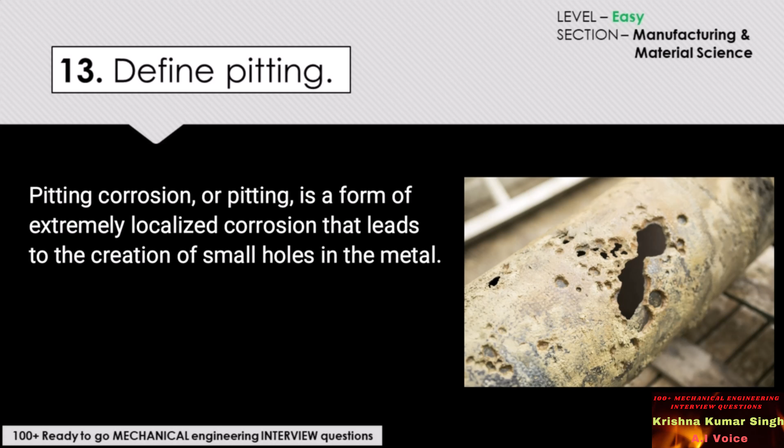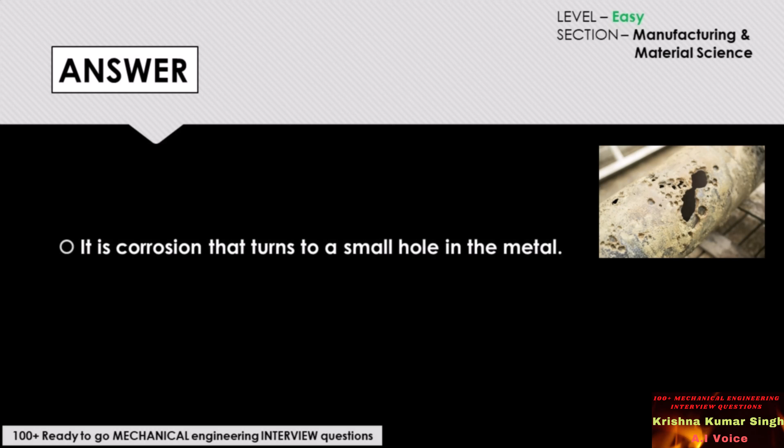Define pitting. Pitting is a form of extremely localized corrosion that leads to the creation of small holes in the metal. The perfect answer for this question would be, it is a type of corrosion that turns to a small hole in the metal.

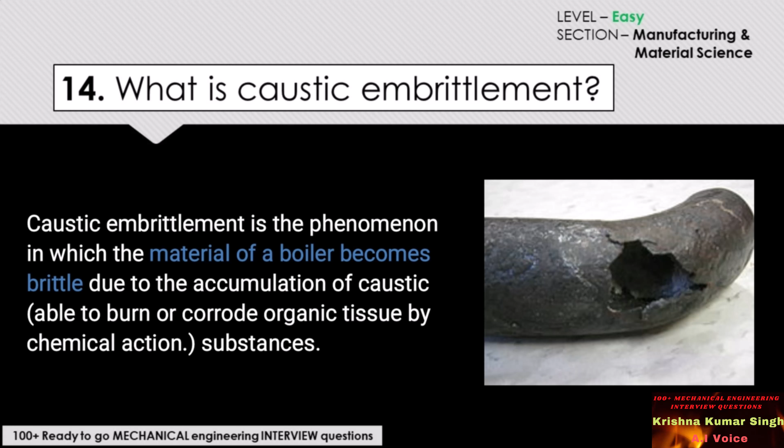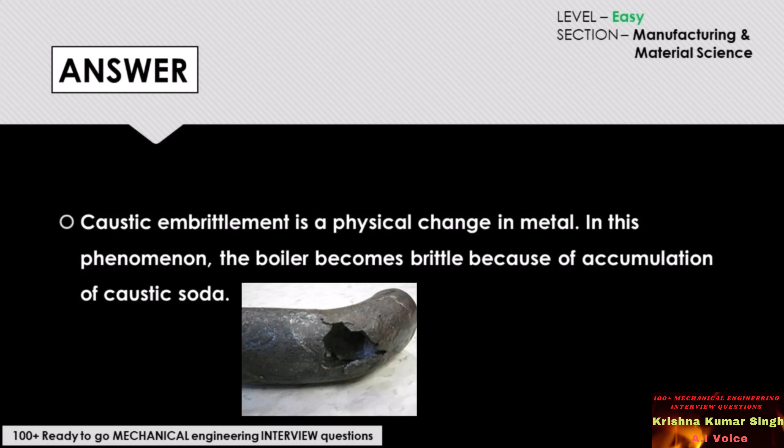What is caustic embrittlement? Caustic embrittlement is the phenomena in which the material of a boiler becomes brittle due to the accumulation of caustic substance. Now, this caustic substance are the substances which are able to burn or corrode organic tissue by chemical action. So the perfect answer for this particular question would be, caustic embrittlement is a physical change in the metal. In this phenomenon, the boiler becomes brittle because of accumulation of caustic soda.

What parameters influence the tool life? Tool life is defined as the time period between two successive grinding of tool and two successive replacement of tool. A cutting tool should have long tool life. When a tool no longer performs the desired function, then it is said that the tool reached its end of life.

A tool's life is given by Taylor's tool life equation, which is given by Vt to power n is equal to C. So the perfect answer for this question would be, the parameters influencing tool life are tool material, work material, speed, feed, depth of cut, tool geometry, cutting fluid, built-up edge generation, and vibrational behavior of the machine tool.

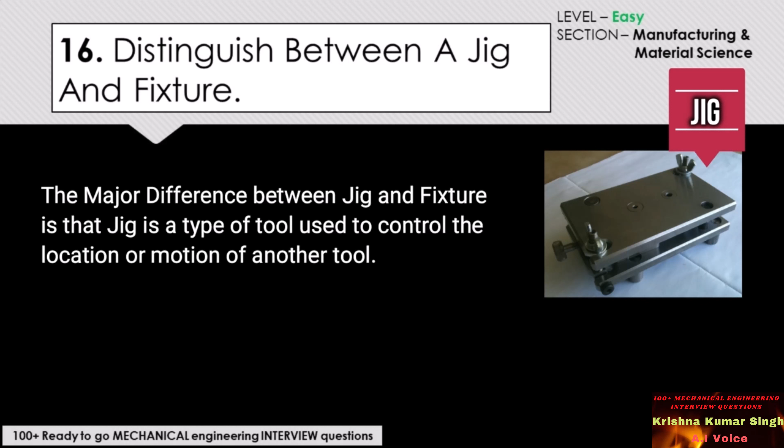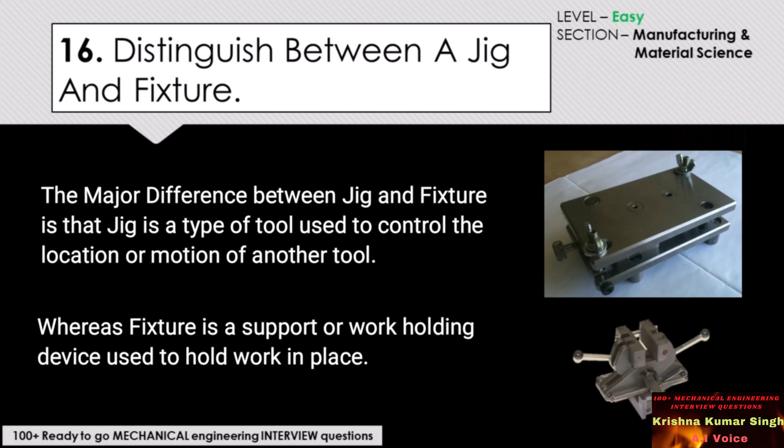Distinguish between a jig and a fixture. The major difference between jig and fixture is that jig is a type of tool used to control the location or motion of another tool, whereas fixture is a support or a work holding device which is used to hold work in place. In metal and as well in woodworking, both jigs and fixtures are essential tools used.

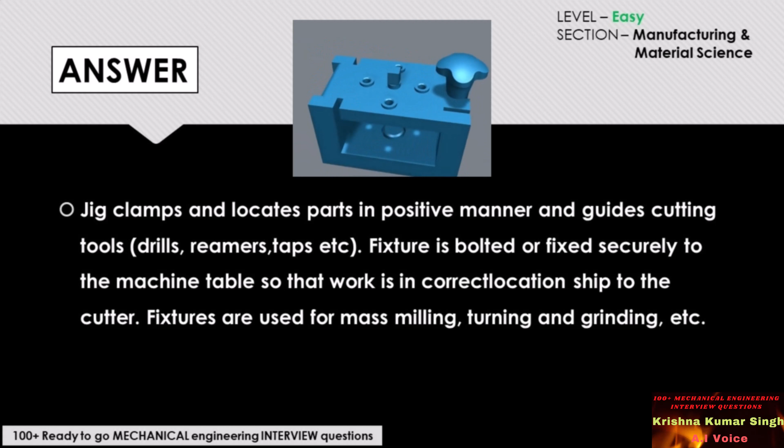So the perfect answer for this particular question would be, jig clamps and locates parts in positive manner and guides cutting tools like drills, reamers, taps, etc. Whereas fixture is bolted or fixed securely to the machine table so that work is in correct location to the cutter or the machine tool. Fixtures are used for mass milling, turning and grinding.

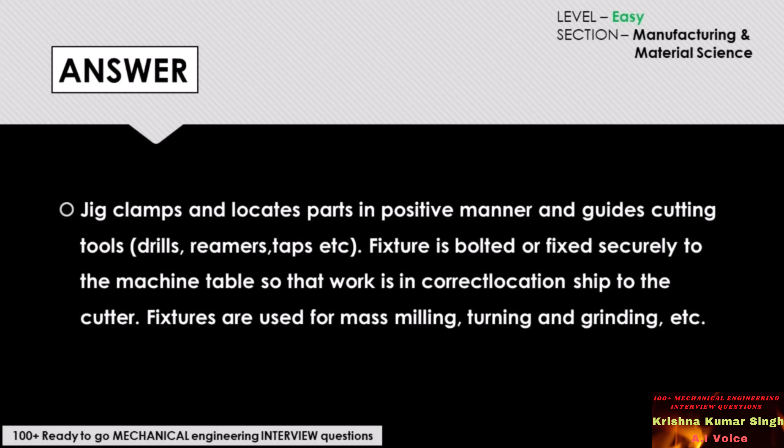Explain knurling. In manufacturing, knurling is a finishing process used to create any combination of horizontal, vertical, or crossing lines on the surface of a workpiece. Knurling is a manufacturing process typically conducted on a lathe, whereby a pattern of straight, angled, or crossed lines is rolled into the material. The answer to this question would be, it is a manufacturing process conducted on a center lathe to create a raised crisscross pattern on a smooth round bar to be used as a handle or something that requires extra grip.

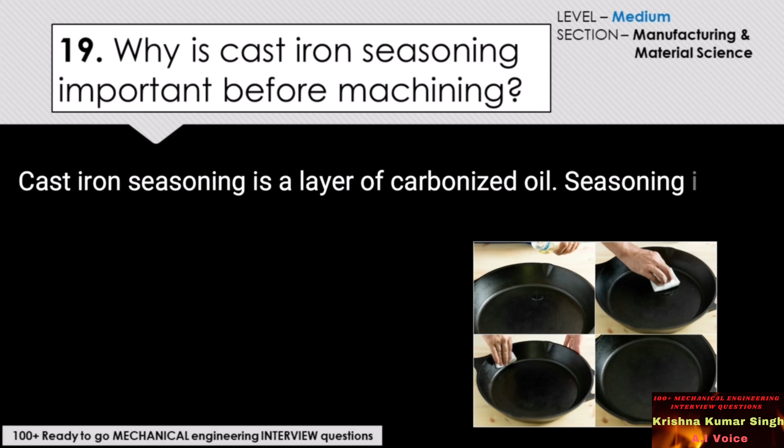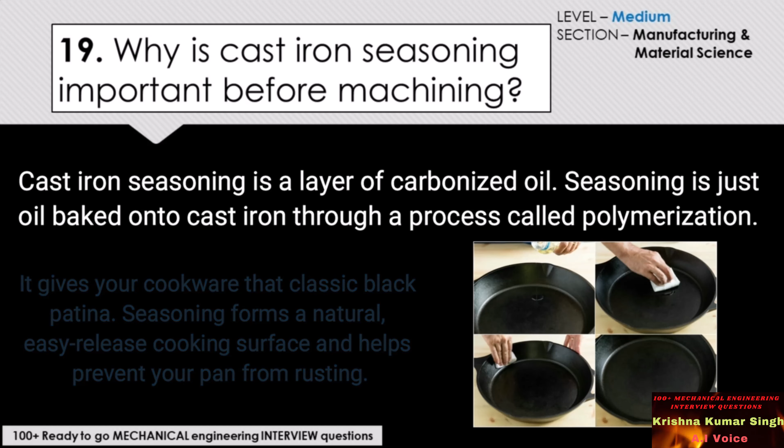Why is cast iron seasoning important before machining process? Cast iron seasoning is a layer of carbonized oil. Seasoning is just oil baked onto cast iron through a process called polymerization. It gives your cookware that classic black patina look. Seasoning forms a natural, easy release cooking surface and helps prevent your pan from rusting. The answer to this question would be, cast iron seasoning is important for easy machining and saving the cutting edge of the tool.

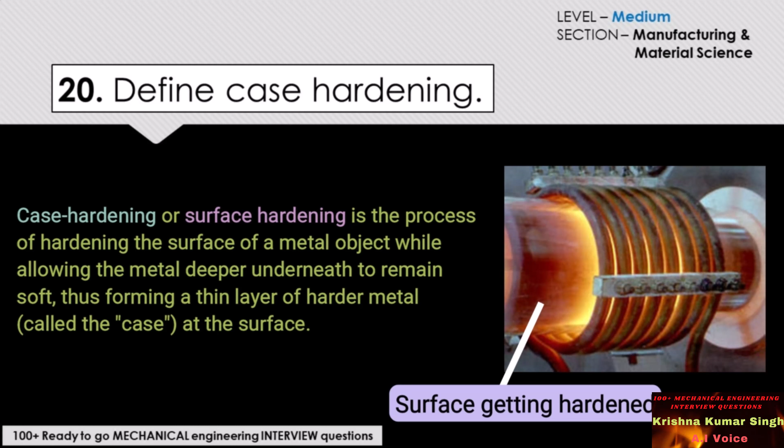Define case hardening. Case hardening or surface hardening is the process of hardening the surface of a metal object while allowing the metal deeper underneath to remain soft, thus forming a thin layer of harder metal which we call the case. And this case is formed at the surface. The answer to this question would be, case hardening is a method of making outer surface of the steel parts harder. It is done to use low carbon steel.

Why is heat treatment of steel metal crucial? Heat treating is a group of industrial, thermal and metalworking processes used to alter the physical and sometimes chemical properties of a material. The answer to this question would be, it is important to get the desired property, the change in electrical and magnetic properties, and relieving of stress after hot or cold working. And that's why heat treatment of steel metal is very crucial.

What is the role of nitrogen in welding? Welding is a fabrication process whereby two or more parts are fused together by means of heat, pressure, or both, forming a joint as soon as the part cools.

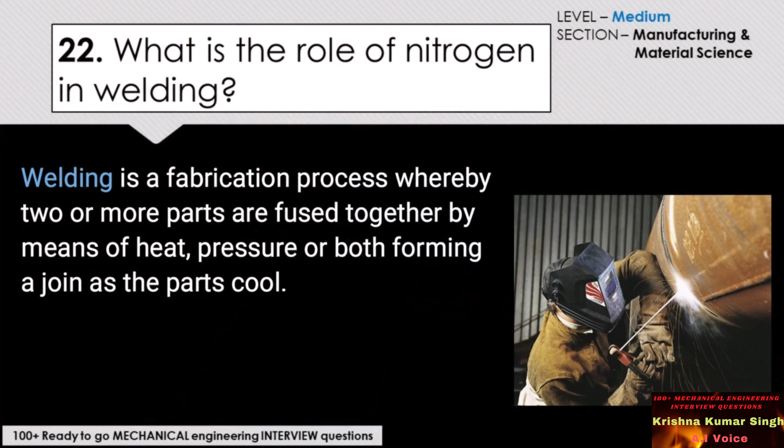The answer to this question would be, nitrogen is used to prevent porosity in the welding member by preventing oxygen and air from entering the molten metal during the welding process. Other gases are also used for this purpose, such as argon, helium, and carbon dioxide.

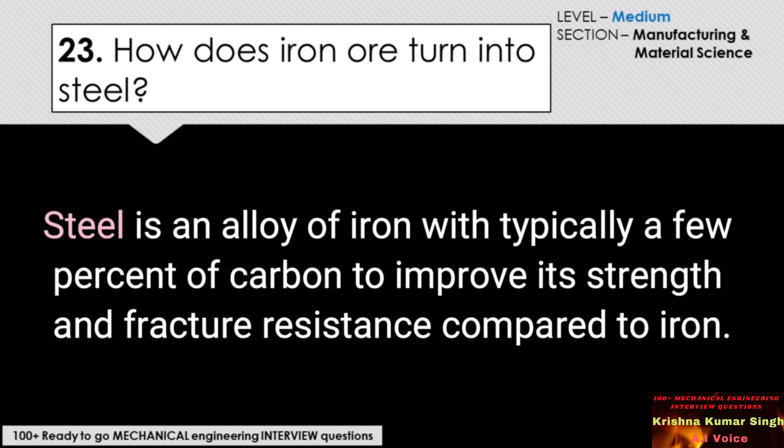How does iron ore turn into steel? Steel is an alloy of iron with typically a few percent of carbon to improve its strength and fracture resistance as compared to iron. Many other elements may be present or added.

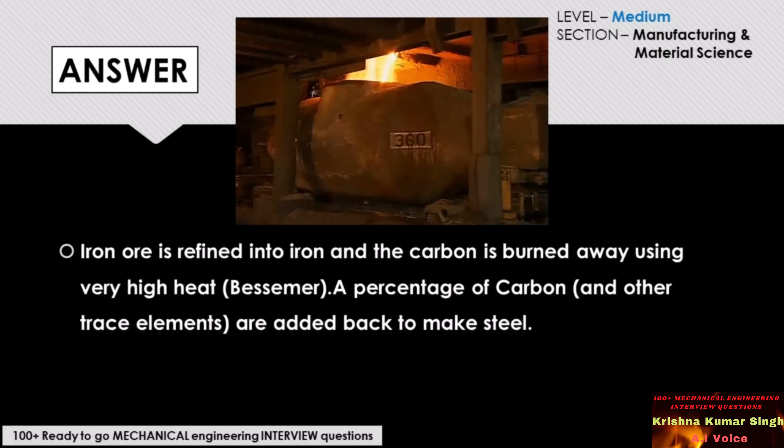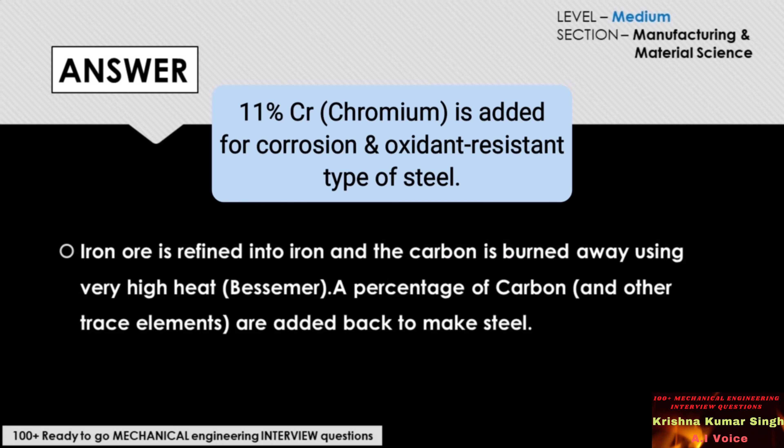The answer to this question would be, iron ore is refined into iron and the carbon is burned away using very high heat. A percentage of carbon and other trace elements are added back to make steel.

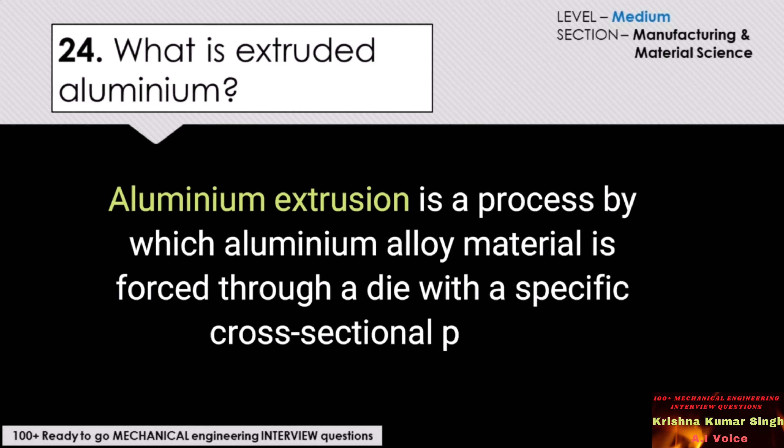What is extruded aluminium? Aluminium extrusion is a process by which aluminium alloy material is forced through a die with a specific cross-sectional profile.

The answer to this particular question would be, extrusion is the process where a metal or a metal bar is pulled through a mandrel to elongate it or give it a final shape. Aluminium which is extruded is a common form of making small aluminium wire, bars or beams, and many varieties of small non-structural decorative pieces. How is the rank of the coal obtained?

Coal is classified into four main types or ranks: anthracite, bituminous, subbituminous, and lignite. The ranking depends on the types and amounts of carbon the coal contains, and on the amount of heat energy the coal can produce.

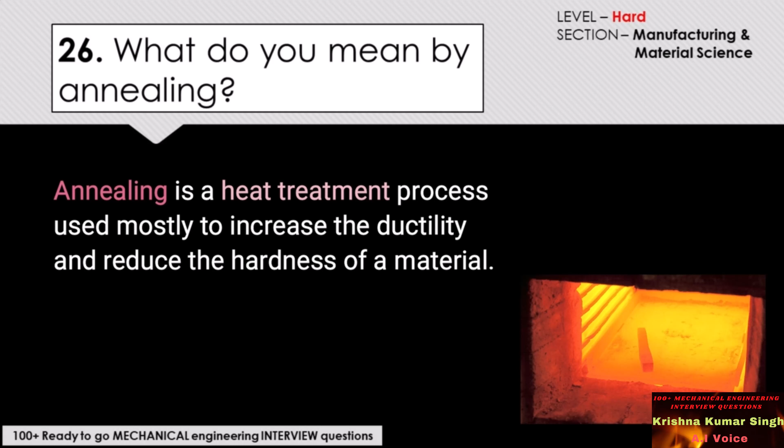What do you mean by annealing? Annealing is a heat treatment process used mostly to increase the ductility and reduce the hardness of a material. This change in hardness and ductility is a result of the reduction of dislocations in the crystal structure of the material.

The answer to this question would be, annealing is the process of heating any material above the recrystallization temperature and cooling after some time. This process decreases the hardness and strength of the material. The result you will get is a reduction of dislocation in the crystal structure of the metal or the material being annealed.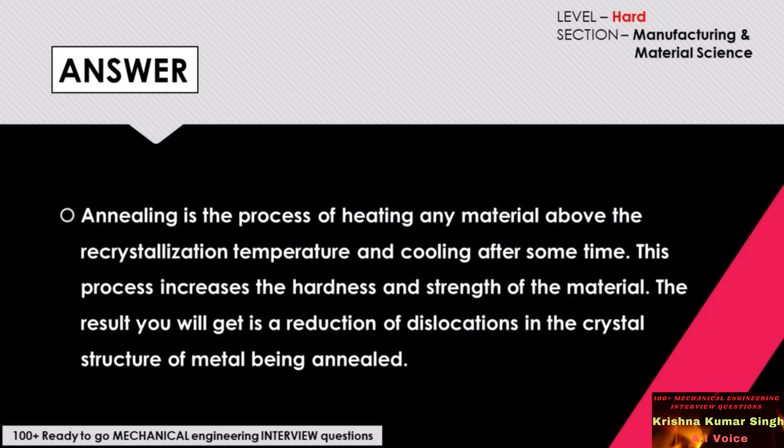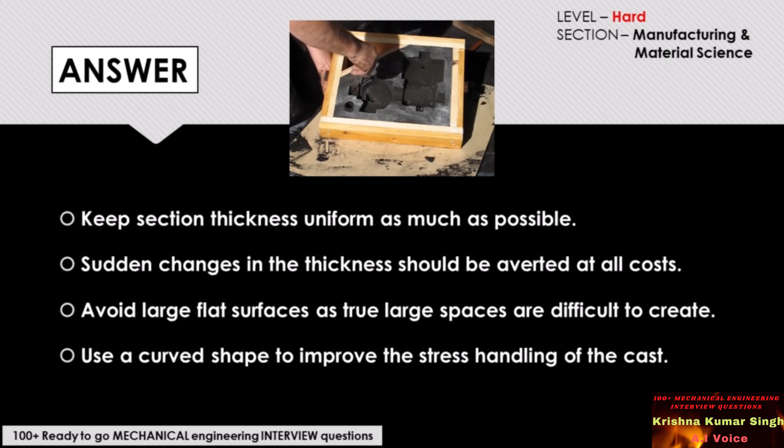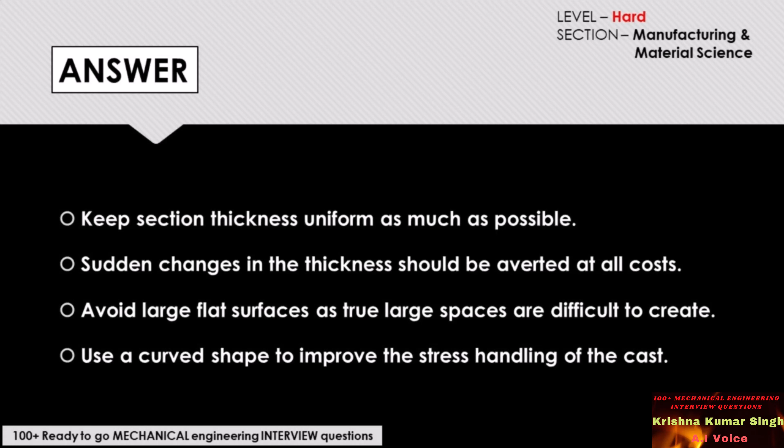Explain the important rules that must be kept in mind while designing castings. You need to keep the section thickness uniform as much as possible. Sudden changes in thickness should be avoided. You must avoid large flat surfaces because large spaces are difficult to create. Always use a curved shape to improve the stress handling of the cast.

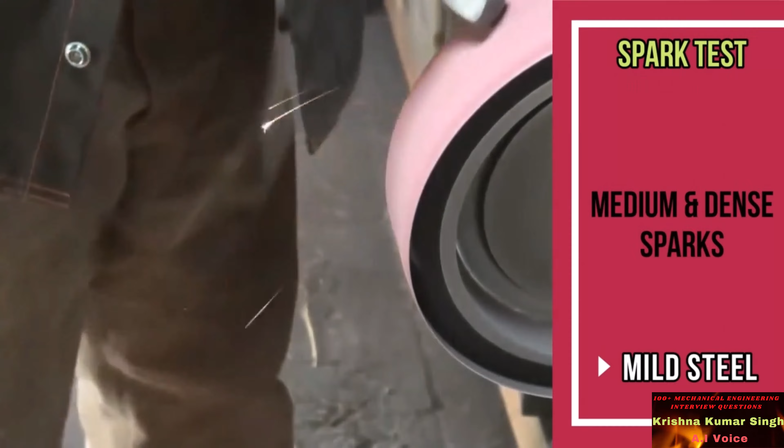How can you identify mild steel, cast iron, and high carbon steel? You can identify these metals by spark testing. Mild steel gives medium and dense sparks. Cast iron gives very thick and short flashes, whereas high carbon steel gives long and thick sparks.

How to report calorific value of fuel? The heat value of a fuel is the amount of heat released during its combustion. It is also referred to as calorific value. This heat value is a measure of fuel's energy density and it is expressed in terms of joules.

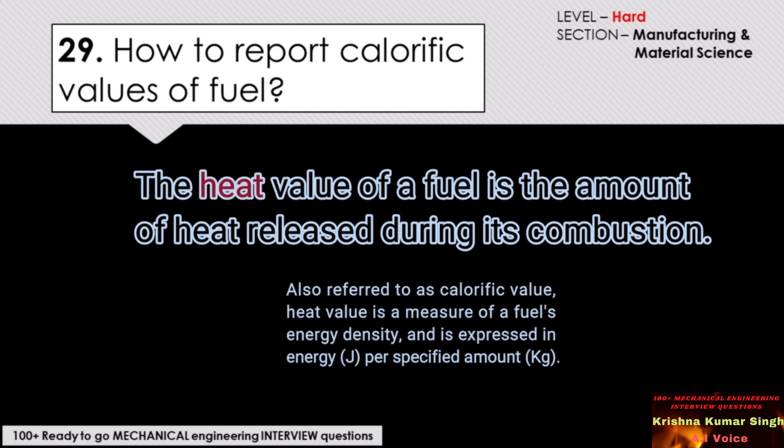The answer to this question would be, in order to report the calorific value of the fuel, we can report it as received or wet basis, as dry or moisture-free basis, and combustible or ash-free basis.

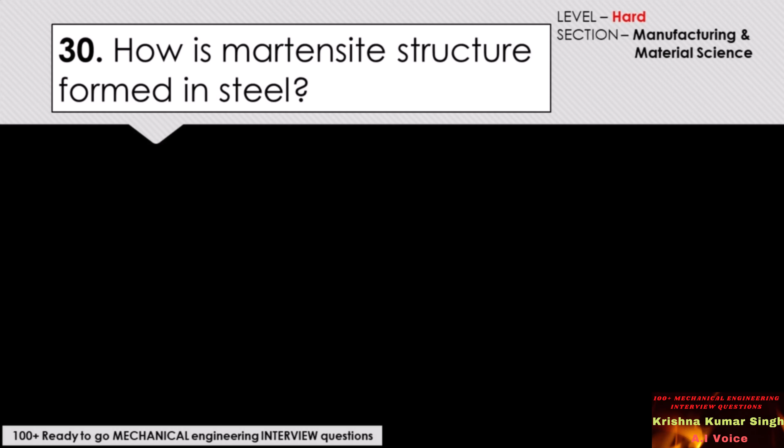How is martensite structure formed in steel? Martensite transformation begins when austenite is cooled below a certain critical temperature, which is called the martensite start temperature. As we go below the martensite start temperature, more and more martensite forms, and complete transformation occurs only at a temperature called the martensite finish temperature. Formation of martensite requires that the austenite phase must be cooled rapidly.

In order to understand what are these phases of the iron-carbon diagram, you must have a clear idea of the Fe-C phase diagram.

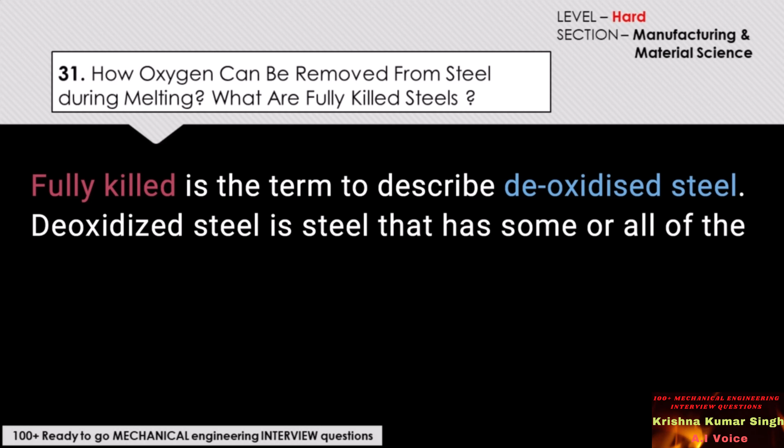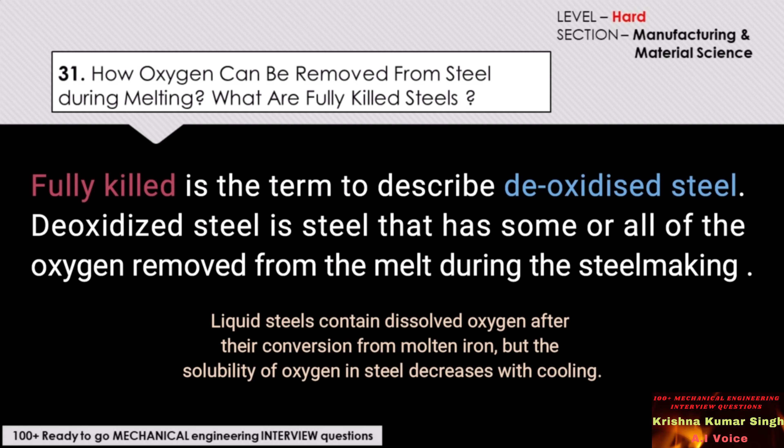How can oxygen be removed from steel during melting, and what are fully killed steels? Fully killed is the term to describe deoxidized steel. Deoxidized steel is a steel that has some or all of the oxygen removed from the melt during the steel making process. Liquid steels contain dissolved oxygen after their conversion from molten iron, but the solubility of oxygen in steel decreases with cooling.

The answer to this question would be, oxygen can be removed by adding elements such as manganese, silicon, or aluminium. Because of their high affinity for oxygen, they react with it to form non-metallic oxides, which rise up into the slag. Steels which have had most of their dissolved oxygen removed are known as fully killed steels.

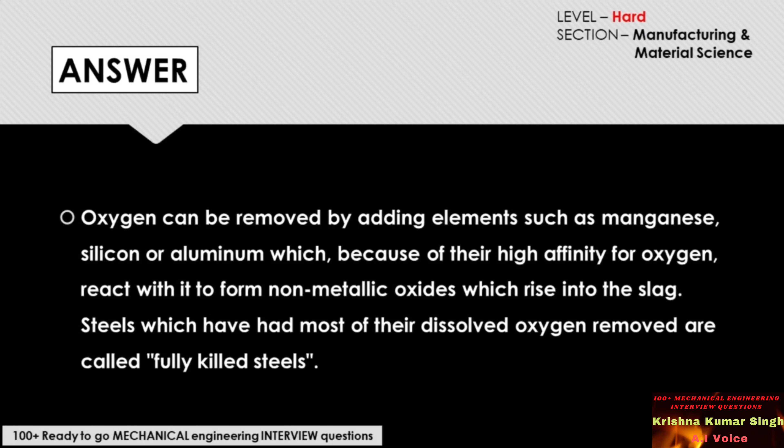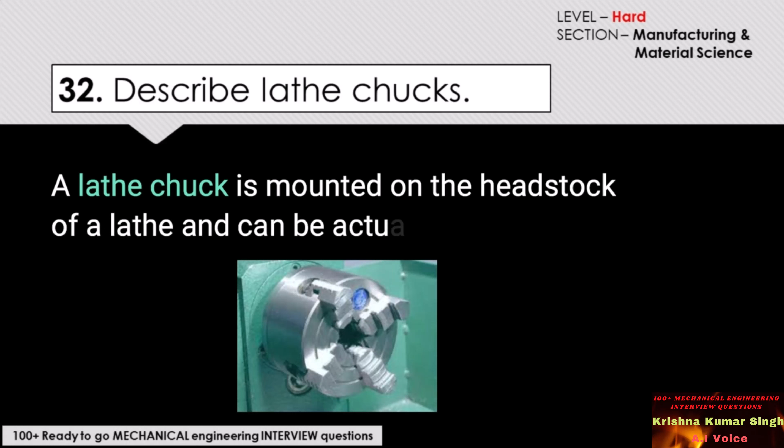Describe lathe chucks. A lathe chuck is mounted on the headstock of a lathe and can be actuated manually or under power. Typically, it is used to hold a rotating workpiece, such as a bar, and some can also hold irregular shaped objects.

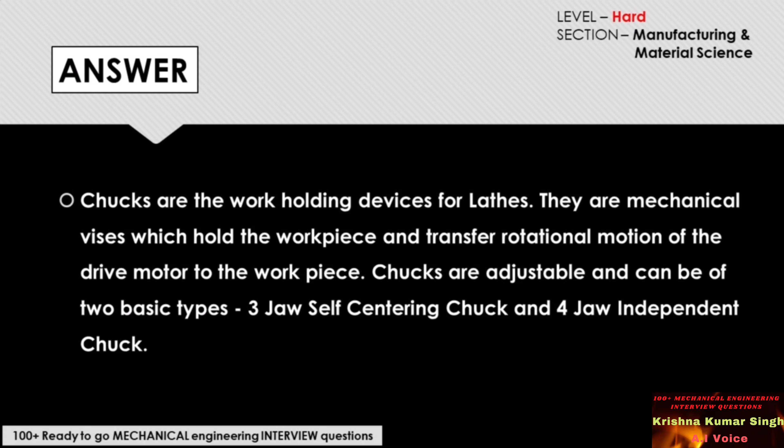The answer to this question would be, chucks are the work holding devices for lathe. They are mechanical vices which hold the workpiece and transfer rotational motion of the drive motor to the workpiece. Chucks are adjustable and they can be of two basic types: 3-jaw self-centering chuck and 4-jaw independent chuck.